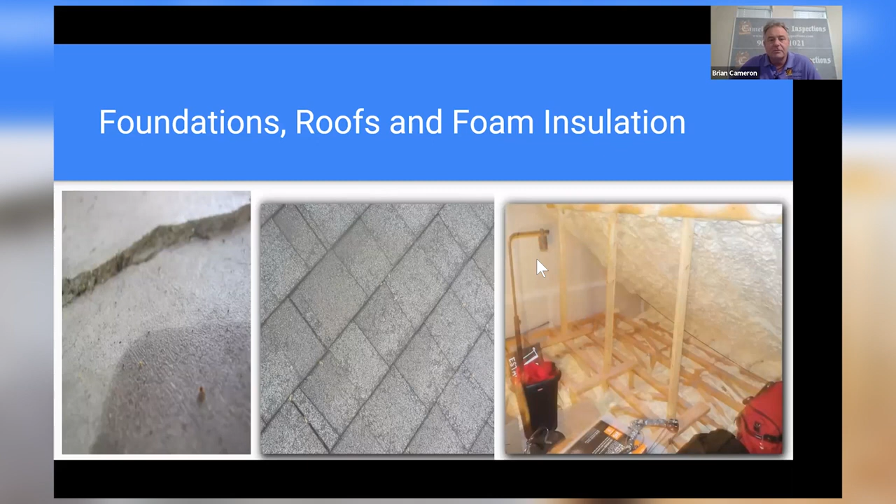What we'll start out with is foundations. I'm just basically going to talk about how I do my foundations and things that I find.

How do you consider a foundation to be bad? Really, that's not our job to consider a foundation bad. We see things that don't look right, and then we should be telling our clients that they should get a foundation company or structural engineer, whatever term you use, to go out to the house.

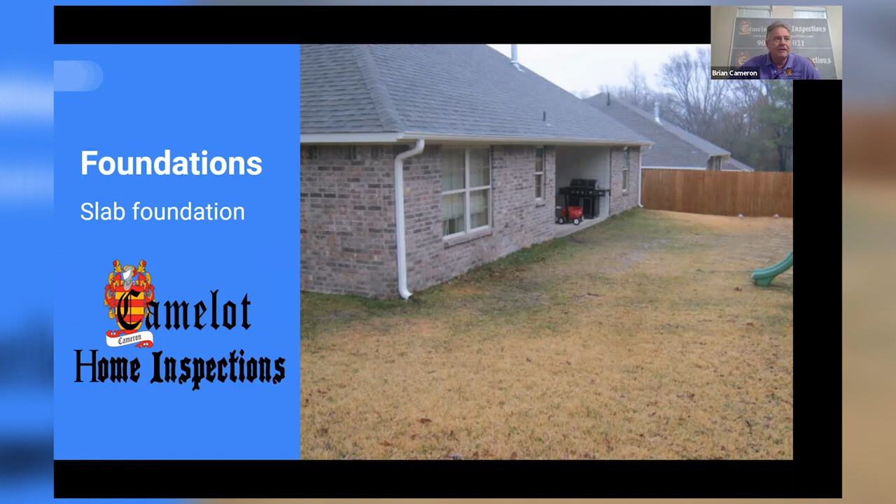So basically, what I'm going to talk about is how to try to figure out if there's a foundation problem or not on a home. The best thing to do, if you think there is, is to put down that they should get a foundation company to come out and take a look at the foundation.

Things that I look for when I'm going around - you can see this first picture right here, they've got a low grade right here. And you can even see a little bit of water that's there.

I don't know, can you see my cursor? I don't know if you can. If somebody can, just type something.

You've got your downspouts coming down right here. It should be away from the foundation area so water doesn't go back up against the foundation. Those are things that I look for.

If I see one crack, that doesn't mean there's a foundation problem. That just means probably settlement in most cases. There have been incidents where there's been a crack and yeah, it was a foundation problem, but in most cases, if you have just a normal crack, it doesn't necessarily throw up red flags. There's usually two or three other things going on with that.

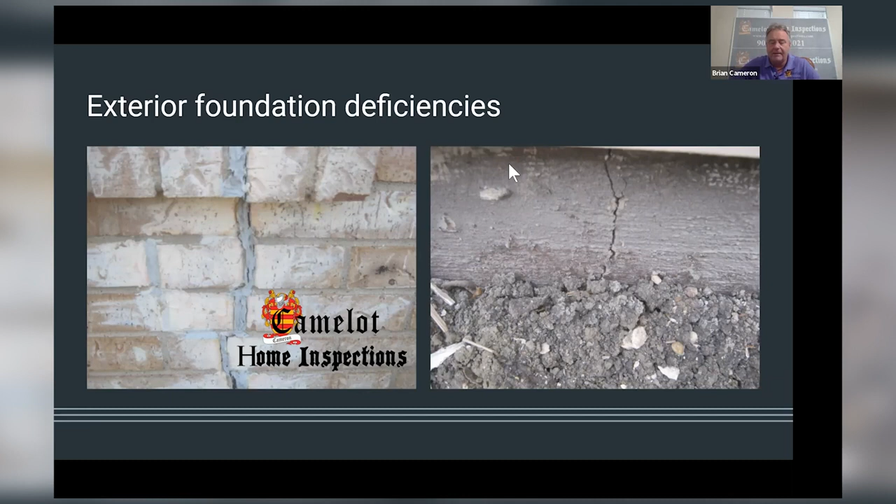The first picture shows cracks that's been basically repaired. That tells me there might have been a foundation problem at one time - maybe they got it fixed. The other picture shows me that there is movement going on there, and that's a lot of movement.

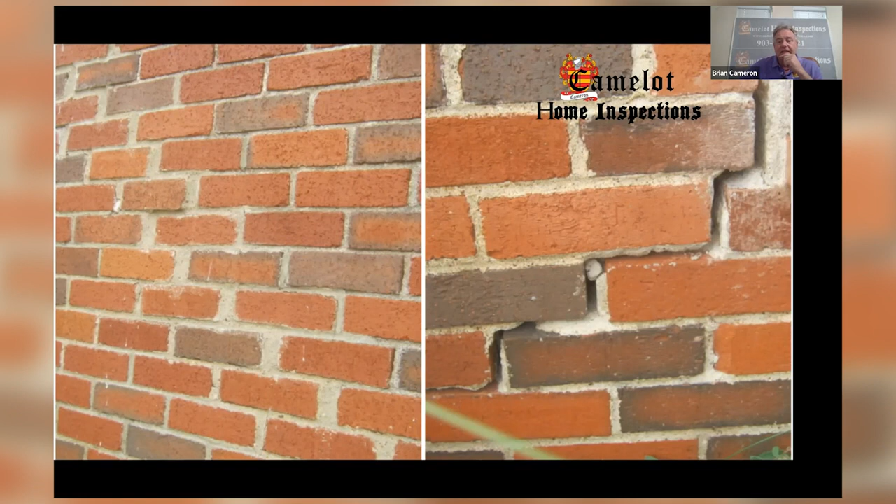You can see right here where the mortar was, and then you can see where it moved. Anytime I see that, I'll probably go inside the house and see what's going on the other side of that wall. I've even seen it where I went up inside the attic and actually saw the roof rafters pulling apart.

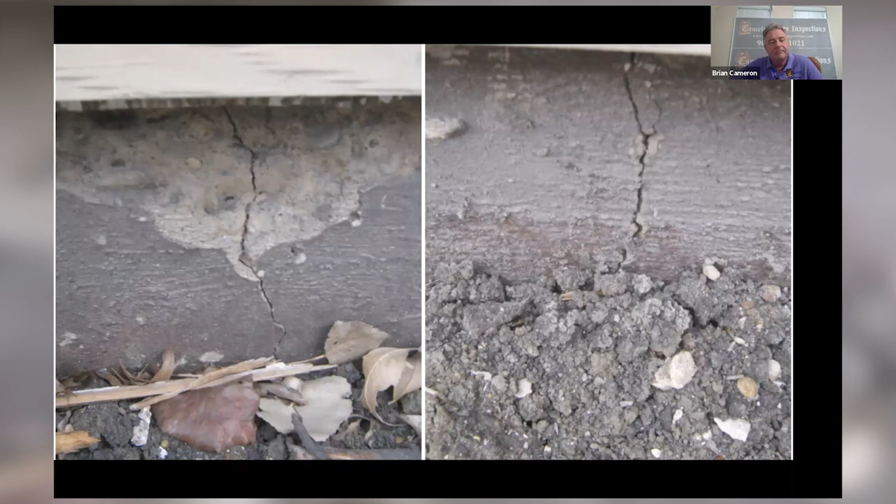Again, foundation cracks going around the house - a lot of times, if you have high soil, that's going to basically keep you from seeing the foundation. I don't go around digging up the foundation all the way around the house. I may take a shovel in a couple of places where I think I might see a crack, but I'm not going to go around the whole house exposing the foundation.

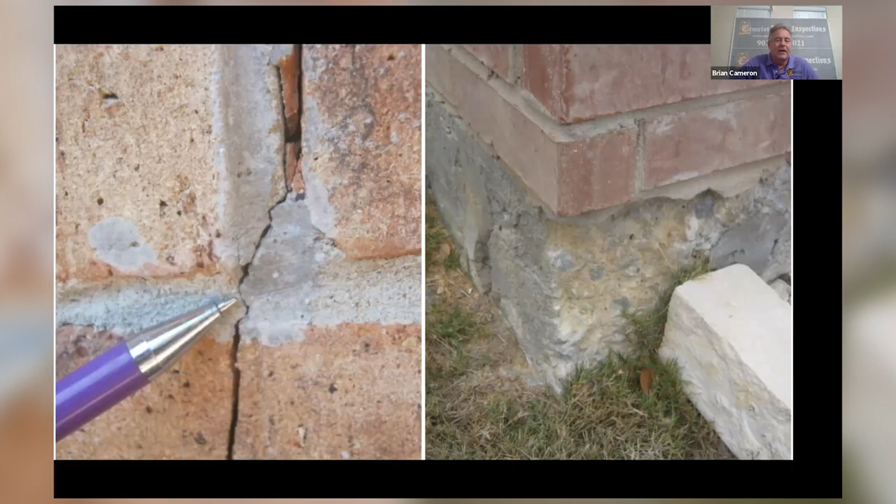This picture right here, the first one, that's what I would call just a settlement crack. That doesn't really bother me as long as there's not a lot of other stuff going along with that. Just keep in mind, the house needs to tell you what's going on with it. It doesn't actually talk to you, we all know that, but all these little bitty things in one area should be able to tell you something about the house.

The next picture is a corner pop. Basically they're caused by the brick - thermal expansion pushes down on that corner and pops it off like that. On this one, I probably would have told them it needs to be repaired, but I would let my client know that's not a big no on buying the house, because it isn't a foundation problem.

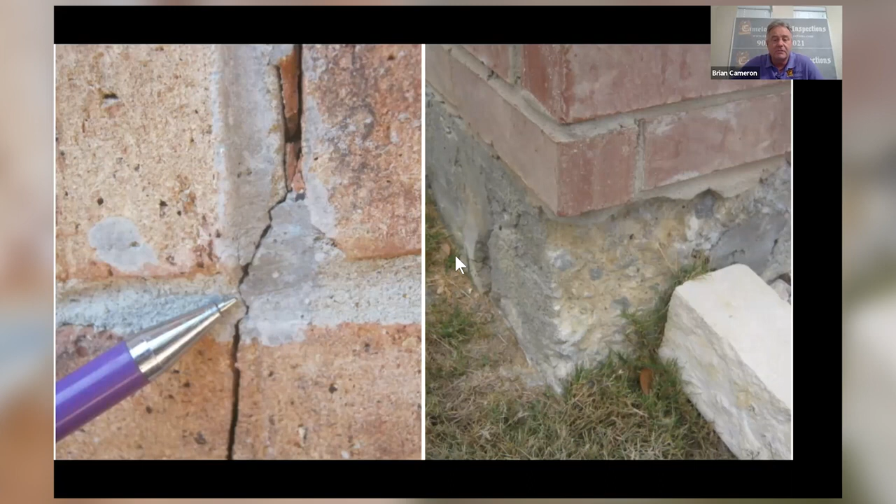A lot of people will see something like that and just think the house is going to fall down. I let them know that this is on just about every house that's around. Sometimes there'll be cracks on the side. I'll put it in the report, but I don't make a big deal out of it. I let the client know, because if they walk around and don't read the whole report and see that, they're going to think I missed something unless they go back to the report. So I try to point these things out to my clients.

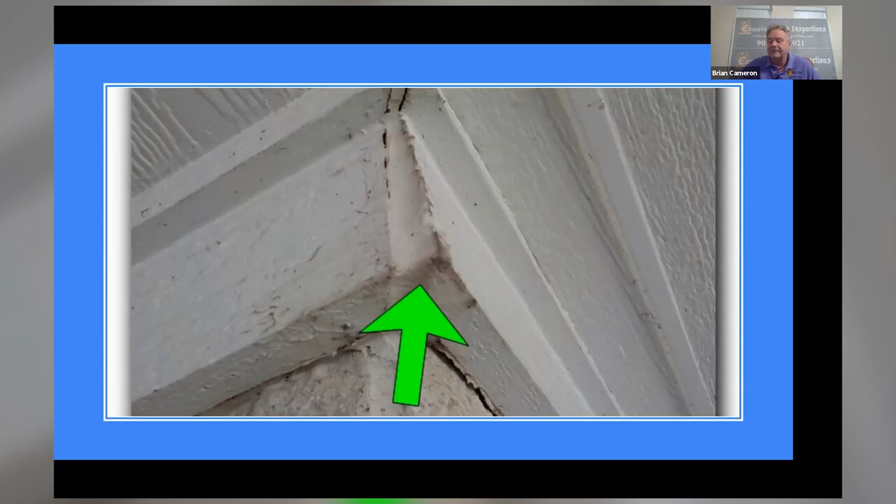If somebody needs to slow me down, I guess you can text whatever you need to do. I see something up here, let me see what this is. Yes, okay, thanks guys, I appreciate that. I didn't know what that was going on.

This is another foundation issue. If you're walking through a house and you see this, you know there's something going on. But at the same time, I'm still not going to tell the client that you have a foundation problem. I would bet my kid's life on it. What I'm going to do is put it inside the report and explain to them that they really need a foundation company to come out and take a look at this and further evaluate what's going on. Me and you may know without a doubt that it's a foundation problem, but in my report writing, I let them know it does need to be looked at, but I'm not going to put in my report that it is a foundation problem.

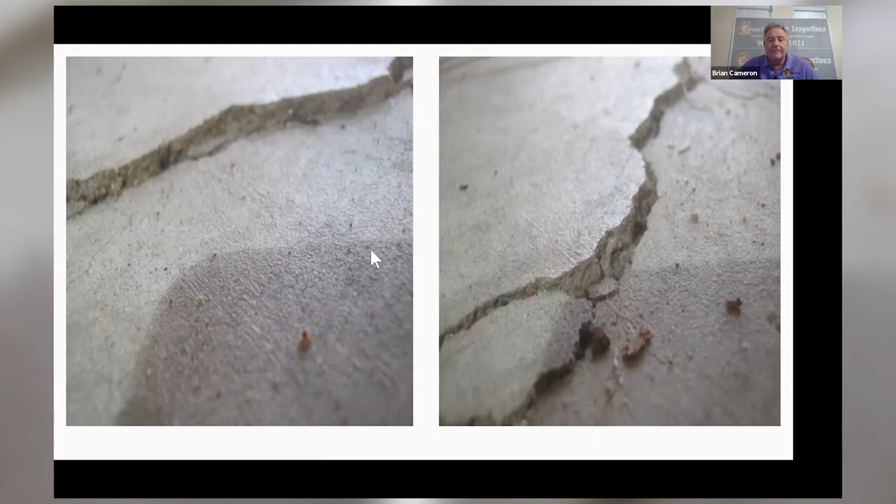Let me make sure I'm in the right place. Yeah, okay, this little square right here, does anybody know what that is? Now that I know where to look for my chats, does anybody know what this square is? Just say it.

This little square that you see right here is normally where a pier has been poured to support the house.

Yes, John. Thank y'all, guys, I appreciate it.

When you have this, I notate it, not necessarily that there's been foundation work done, even though me and you know this without a doubt, I'm still not going to put it in there. The reason why is because you can have a client, a seller, not know the house had a foundation problem, and they can just come unglued, and then you have to go back out to the house and explain to them what's going on. You don't have to, but it's the right thing to do. So in order to get rid of all that, I put down that there is movement, and it looks like there has been some foundation movement inside the house. There are these little squares that resemble where they would put piers for a foundation problem, and you see where I'm going. You can read what I got right there on the side. Basically, that's one of my narratives for this.

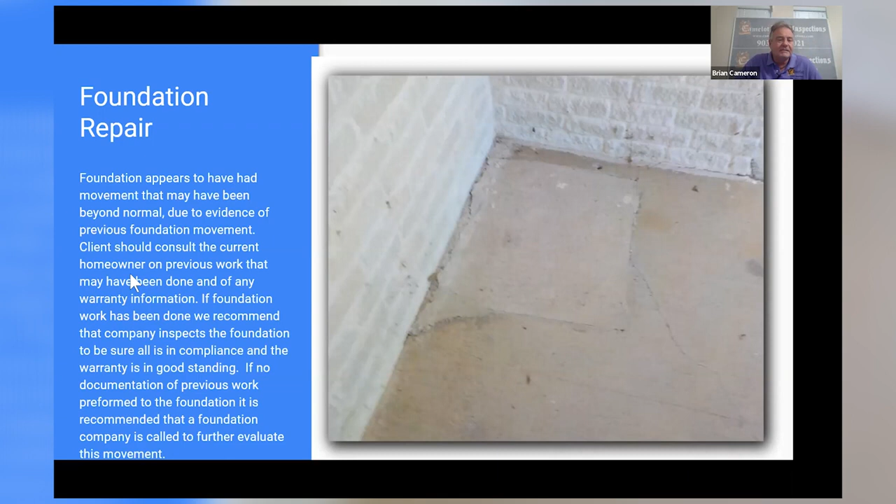So it's the diagonal lines I really pay attention to. Another thing to check is inside of closets. A lot of times people flipping a house won't take care of cracks inside the closet, they may just paint over them. If I see a crack that's been sealed up, I'll say it looks like there was a crack there, I put in my report what I'm actually seeing. Older houses are going to have cracks like this that have nothing to do with the foundation at all. You have to figure out which is which as you go through the house, let everything come to you and you'll figure it out. Then you'll know whether you should call a foundation company to come look at it, or maybe it's a crack that should just be monitored since it's not causing problems now, but we don't know what it'll do in the future.

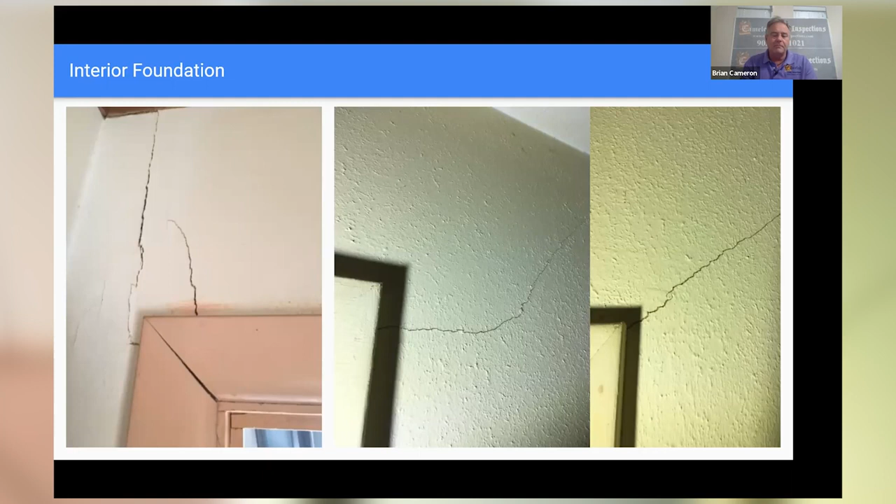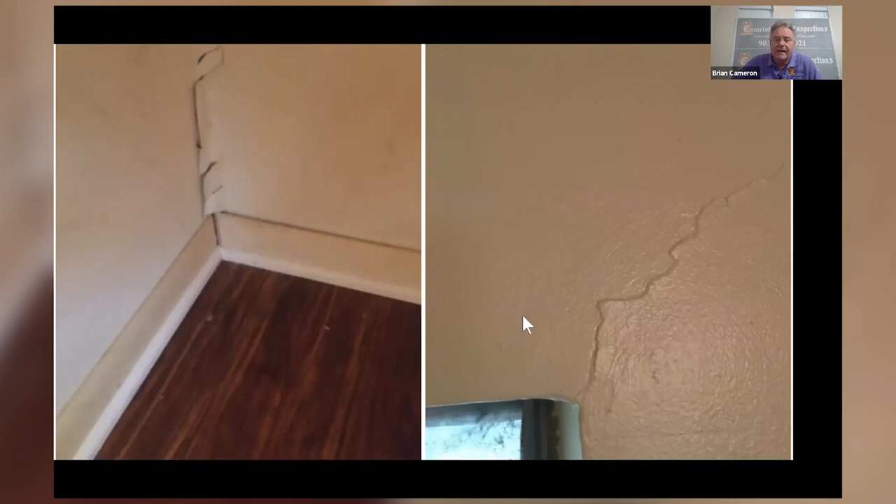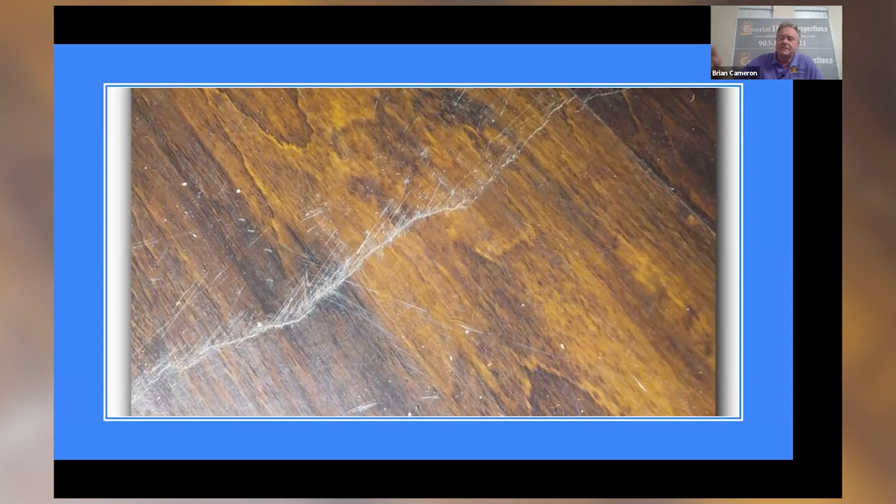To tell you the truth, this floor right here with the crack going through it underneath the linoleum is good enough to put down that there's foundation movement going on and it needs to be looked at. But I like to know for myself - the more things you look at like this as an inspector, whether you're new or a veteran, the more you search it out, the more knowledge you'll have on each inspection you do. It's going to make you smarter and smarter.

Pier and beam foundations, basically just rotten wood, moisture, rotten wood, fungus growing on the subfloor.

Hey Greg, good, the fungus growing on the subfloor - basically that's from moisture. If you go underneath the house and there's a dark colored powdery substance underneath the subfloor, I don't call anything mold. That's not in my vocabulary, it's not in my reports' vocabulary, but it's either discoloration from moisture or something like that. Anytime I find that, I put it in the report and let them know they have some kind of fungus growing underneath the house, most likely from water, or moisture is a better word.

What happens is moisture gets on the ground, and that ground moisture will evaporate, and when it evaporates, the wood sucks it in.

When the wood sucks in moisture over years and years, it's going to cause wood rot. If you go underneath the house, you've seen where it's caving in, the wood's caving in. That's usually from too much moisture underneath the house, unless it's termites. But I'm talking about when it's moisture.

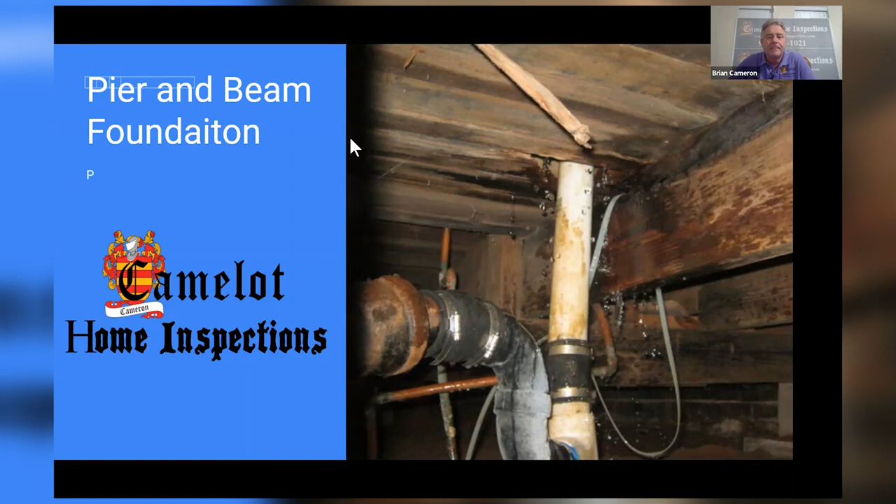This first picture in that corner - I can tell you a few places where, whenever you drive up to a house, you got the valleys coming in the front, and then you got a porch with the cover on it. Where those valleys come, when you have a pier and beam home and water's falling down onto the ground and bouncing back up, it's going into that crawl space area. That's a lot of water throughout the years.

This one right here, I remember I could stick my finger right in there. The wood over here is good and the wood over here is good, but some way or another, the water was coming off the roof and hitting the ground and bouncing back up into there - there might have been a vent on the other side of this. Anyway, water was bouncing back up in there and going to this area.

Again, I don't explain all that inside of my report. I basically put in there that there is some rotten wood and we recommend a pier and beam company come out and take a look at it.

Over here to the right, you see the piers right here. I didn't get the picture that good, but those two boards you see right there are going straight up to the floor joist. You can't have that, especially when the house is using beams all the way around. There are very few houses I've run into that use the floor joist to support - it's almost like little boxes everywhere, and then they've got the piers coming up supporting that.

But anytime you have a pier that goes straight up to a floor joist like that, basically what's going on is when that house is settling, where those piers are, they're going to leave humps in most cases. And you don't want that.

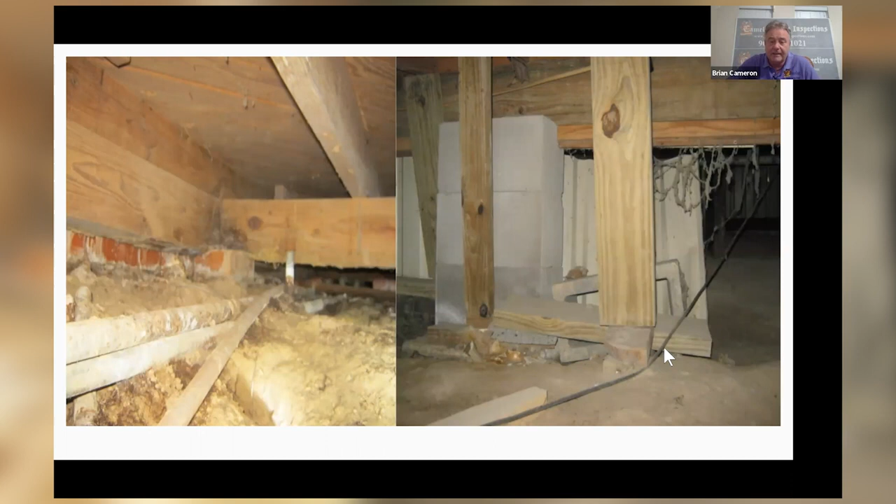This area right here was where the water is coming off the valleys and hitting - no one knew about it. This is at the very front of the house. It's kind of hard to get to, and the wood was just decayed away. They even had some foundation work done to this house. You see that board underneath - that's a newer board than everything else. I don't really know what they were doing there, I have no idea, but it went into the report.

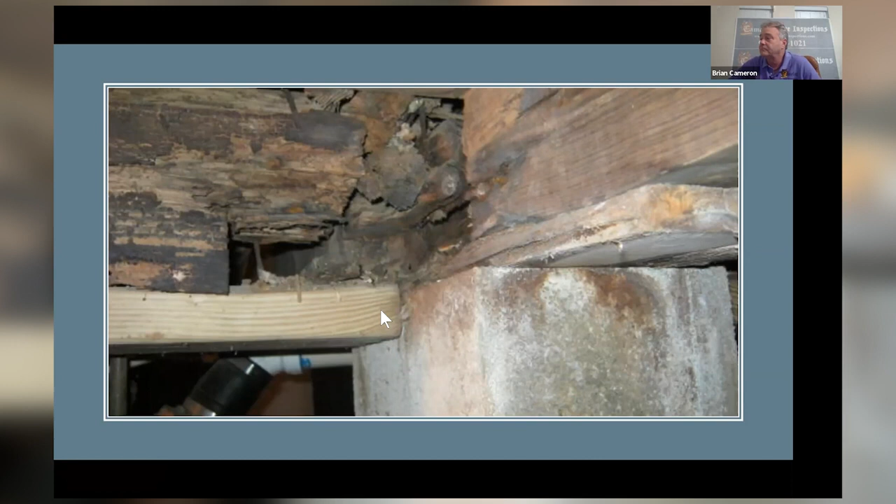Again, this is that fungus I was telling you about. This is the water stain. Your main place is to look underneath the house. You're not going to be able to look at every inch of everything that's going on, but what you can look at, if you can get to it, are laundry rooms, bathrooms, kitchens - the places where there's valleys coming down and the water's hitting down.

If you have a front door that doesn't have a cover over it, underneath, inside the crawl space, underneath that threshold of that door - front door or back door - you're probably going to find wood rot there. Those are places you can go and look and you'll know. If you're just getting started out, it's best to go inside a crawl space and take extra time in there and look at things. You'll be surprised what you find when you take your time and really go through it and look good at everything on there inside the crawl space area.

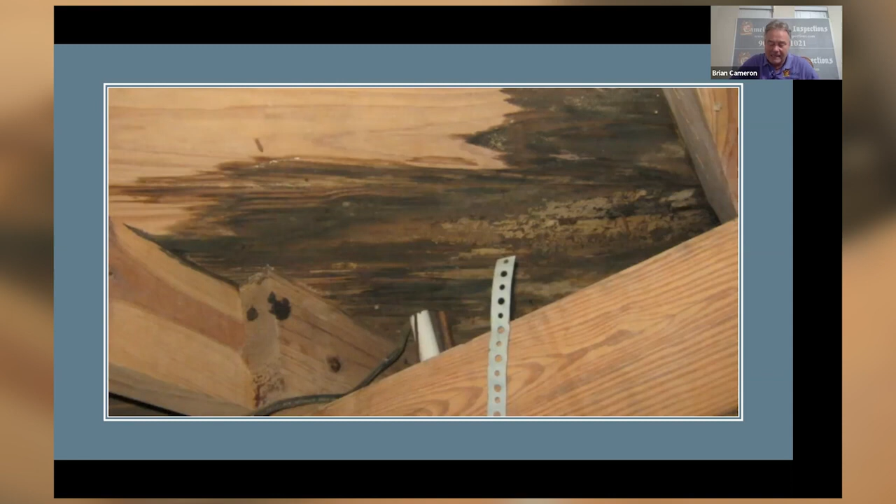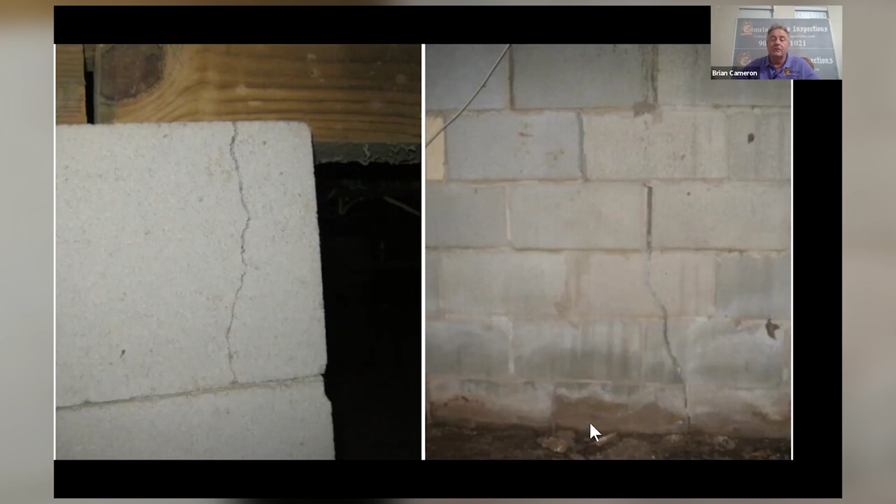The next picture we have up here at the top, where these cinder blocks are, you come down and I can tell somebody's done repairs there. That doesn't really bother me, somebody sealed that up. But anytime I have a pier and beam foundation wall like this with cracks through the cinder blocks, and I see there's been water down here - that's a water line, and you've got some efflorescence going on right here - there's a water problem underneath this house. More than likely it's gotten wet and one side or the other has shifted or sunk down, and that's what caused that. Again, a pier and beam company would be called out on this.

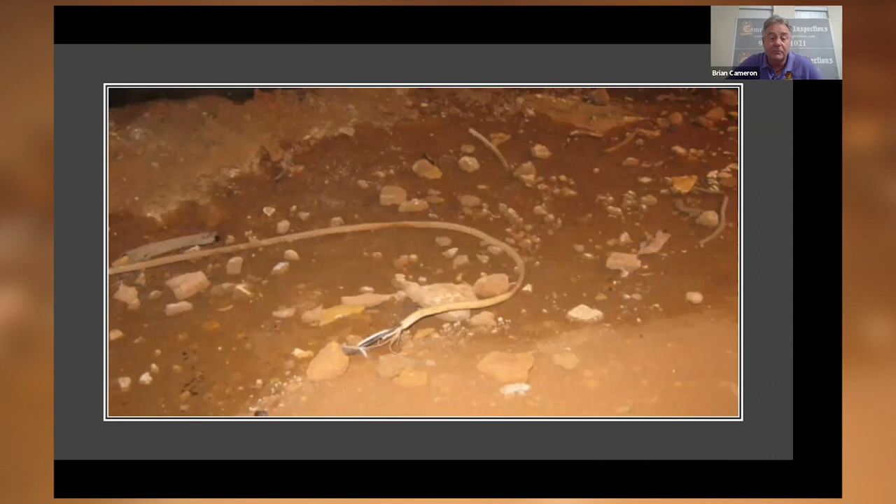Electrical wires, we talked about that. This electrical wire right here was actually live and in a moisture area, so I stayed on all dry ground whenever I went underneath the house, and I made it out. I didn't see this until I was all the way in there, but I won't go under a house if I see a bunch of electrical wires. I won't go underneath the house if they're all on the ground. I'll basically just let them know they need to get those electrical wires up off the ground.

Brian, you said the powder is, and then you stopped. Are you asking me what the powder is? That was from a while ago. Sorry, I'm just not seeing that. Oh okay, I see what you're doing. Okay, did I answer the question on that - the powder is? Okay, good. Thank you.

Anyway, electrical wires, you need to watch out for that. All electrical wires shouldn't be on the ground. If you go underneath the house and you see sewer pipes that are basically on the ground, I write that up - they should be on straps. That way, if the house is settling, that pipe's going to move with the house. It isn't just going to sit on the ground while the house moves, which would cause problems in the connections of that pipe.

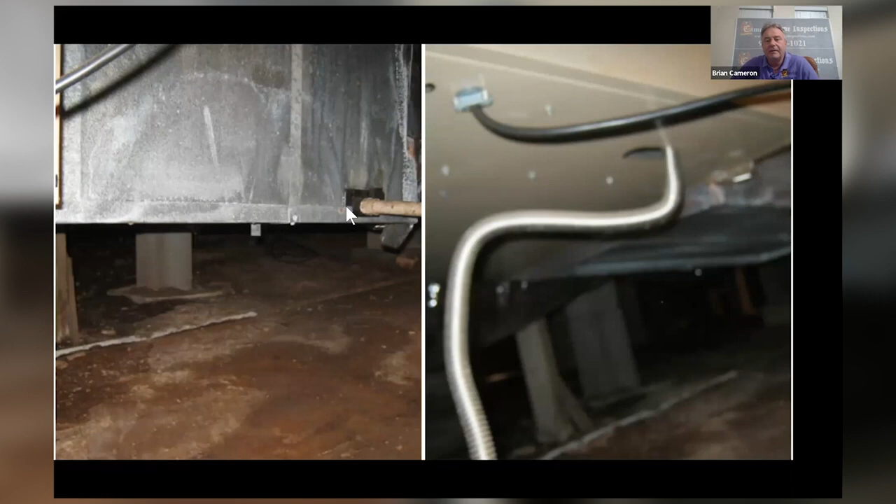I know we're not talking about HVAC units, but you're going to run into those inside of crawl spaces. They should still have a drip pan, and they should also have their secondary line going out of the house as well. This one right here doesn't, and it should. And then over here, let me move this line - that is actually a flex line, and it shouldn't be going into the cabinet like that. They should have a rigid pipe coming out. Again, we're not talking about HVAC units, but since that was in there, you're going to run into these.

Same thing with the water heater - if you've got a water heater underneath the house, I would want it in a drip pan, because you don't want moisture on the ground. You want that moisture to run out, and if it's in a drip pan, it's probably going to run out. The more moisture you have, the more insects and rodents you're going to have. And if it's a lot of moisture, you're going to have piers that sink down into the ground.

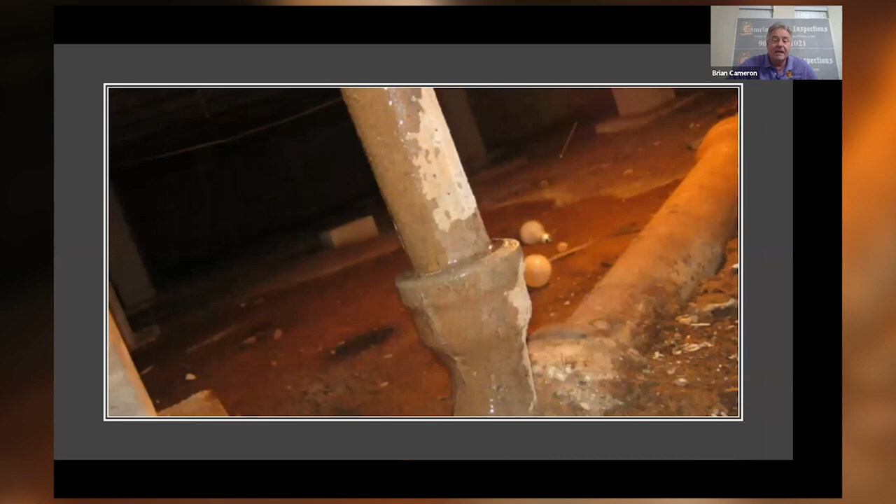Cast iron pipe - anytime I run into a house with cast iron pipe, I make a notation of it and really look at it as well as I can. I'll go as far as taking a screwdriver and digging underneath this pipe to see if there's any moisture. If you've got a house built in 1960 or 1970 with cast iron pipe, I don't put this in my report because I'm not supposed to, but I do tell them it would be best to have a plumber come out and take a look to make sure it's still functioning as it should be. A lot of times I'll find where they've replaced a lot of stuff with PVC, but you'll still have a cast iron pipe. This one right here is leaking at the connection.

You'll also see cast iron pipe, and you'll see little anodes coming off of it. It looks like slime that's dripping, but it can be hard. What that is, is the cast iron pipe dilapidates, and moisture is moving in between the dilapidation. Basically what it's doing is water is just coming through, but it isn't big enough to really drip yet. You'd probably stick a screwdriver in there and punch it.

Why would you? Okay, here's the reason why. If you do a home inspection, somebody just asked, why would you not? I do make a notation of the cast iron pipe in my report, regardless if it's good or not good. Does that answer your question, Steve? Okay good.

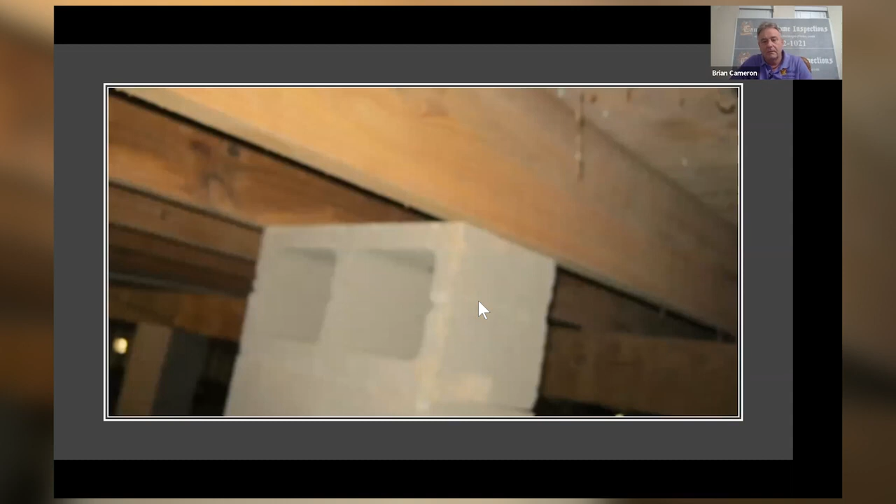Again, we have this area right here where you see the beam back here going straight across, but you have a pier going up against a floor joist. You don't want that. If they're going to reinforce this for some reason, they should take a beam from one end to the other, is what they should really do.

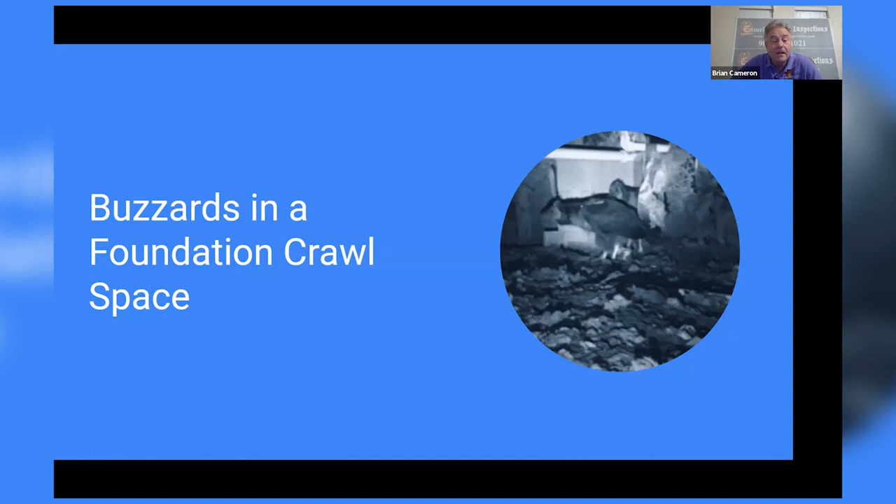Inside the crawl space, I've run into a lot of weird things. The weirdest, I guess, that you wouldn't expect is buzzards inside the foundation crawl space. Man, you're talking about something stink - that was horrible, and those were baby buzzards too. What they were doing in there, I have no idea. They didn't bother me, I didn't bother them. At first I wasn't sure what they were, but then the daddy or the mama came in, and I'm glad I got out when that one came in.

Spiders are going to be all inside the foundation crawl space, so you need to be careful and watch out for them. A real quick story - I was doing a house, matter of fact in the town I was living in, as a pier and beam. I crawled in on my belly, all the way inside, and I'm looking up at the floor with a flashlight, and I start seeing these little red dots. I didn't know what they were, so I turned around. About every 4 feet in between the floor joist and the subfloor were spiders - all of them were black widows underneath that whole house.

So I got out of there as careful and as quick as I could. Be careful when you go inside a house - always look everywhere before you actually crawl in, especially on each side of you. I've seen snakes - when I stick my head in there, they'll be right there. You need to make sure you don't just crawl all the way in, get scared, and it's gonna bite you. Anybody that knows me knows me and snakes are not friends - we will never be friends.

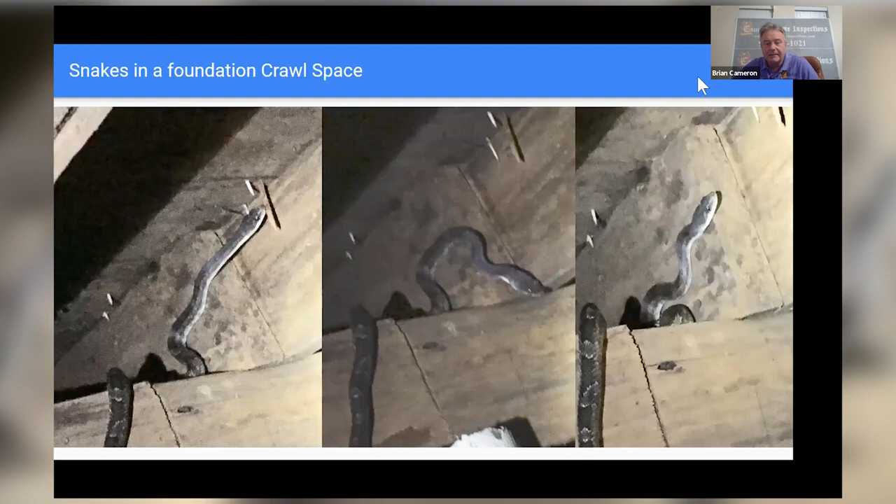This is a picture of a snake that was underneath the house that I did. It's all the same snake, not 3 snakes. And this right here, I did have a video, but I couldn't get it on here, of a snake that I found inside of an electrical panel. I videoed that, but it's not on here.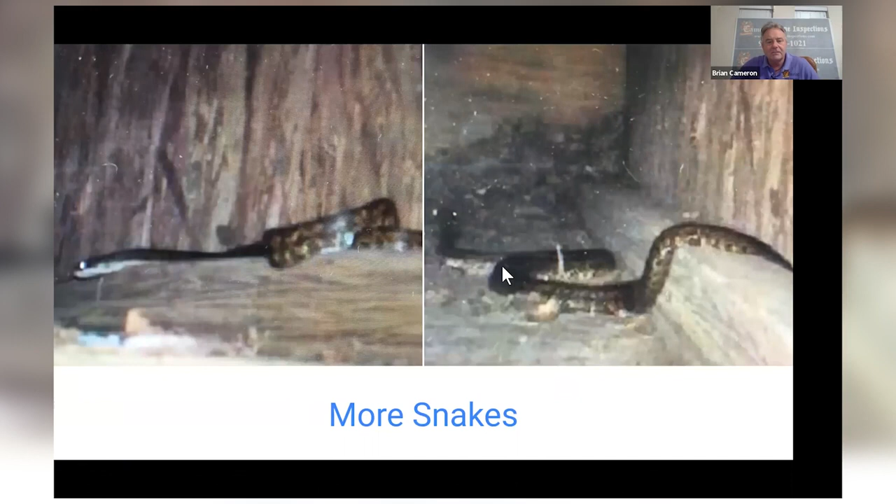Next, we're going to talk about roofs. I'm going to shoot through here because I'm taking too long, and I really do want to get to foam insulation, so if you have a question, keep an eye on the chat and ask. I want to talk about 3 types of roof coverings: fiberglass shingle, metal roofs, and terracotta roofs.

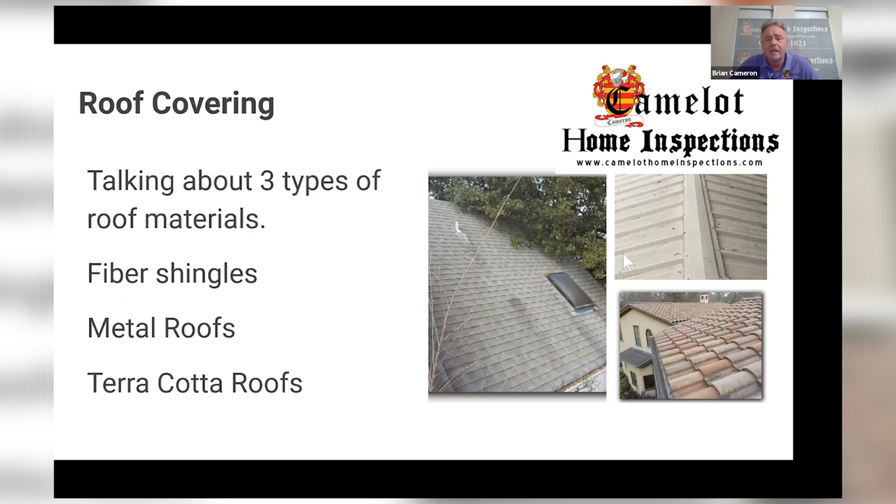Basically, the common deficiencies that I see on fiberglass shingles is the felt paper not being put on right. I'm not sure if everybody knows how to put felt paper on a roof, but on the sides it should go under the drip edge, and on the front it should go over. There's a lot of discussions, and it's different, but that's the way that I do it, and most people in my area do it.

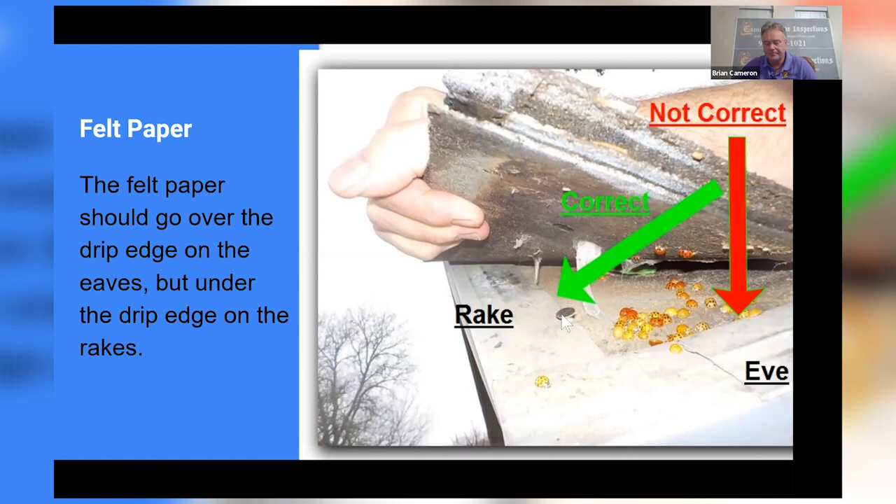Now, in Florida, their code is to go underneath the drip edge all the way around, and I'm sure it has something to do with hurricanes. But where I am, and this is the way most people do it, it shouldn't go underneath the drip edge at the eave. It should go over the drip edge at the eave, and then the rake should go under the rake. Again, it's going underneath the drip edge here. These are areas that you can look at.

When you first drive up to a house, notice where the walls meet the shingle, and raise those shingles up a little bit. Don't tear those shingles or anything like that, but I try to raise them up and put my hand under there, because a lot of times you're going to find rotten wood right there. Also by front porches where it's got a little wall like that, same thing.

Also up here, the soffit will have damage to it, because you have all this water coming down from this roof. On this other side over here, you don't necessarily have it — that's just a regular slope going up, a gable roof right there — but you do have a valley here, and you want to look at these places.

Also around any of the flashing, especially the electrical mast, you want to look at that and see if it's even got flashing around it. A lot of times they'll just put caulking around them, but you'll find some wood right there. Also just above the electrical meter, if you look up in there, you can kind of tell.

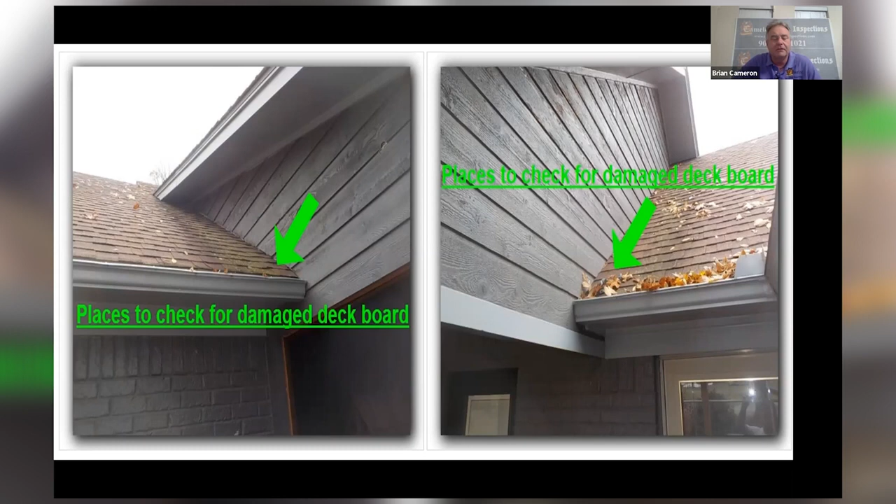With seal strips, you never want to undo them on a roof just to see if the nails are overdriven or in the right place. Once you undo that seal strip, it's never going to be the same again — they'll have to come back with some kind of sealant and seal it back down. If you have a shingle that's loose, you can raise it up if you want, but I tell all my guys, don't mess with the seal strips, don't pull up on them. What'll end up happening is you'll tear the shingle down here, or rip it as you're trying to raise it up to look at something.

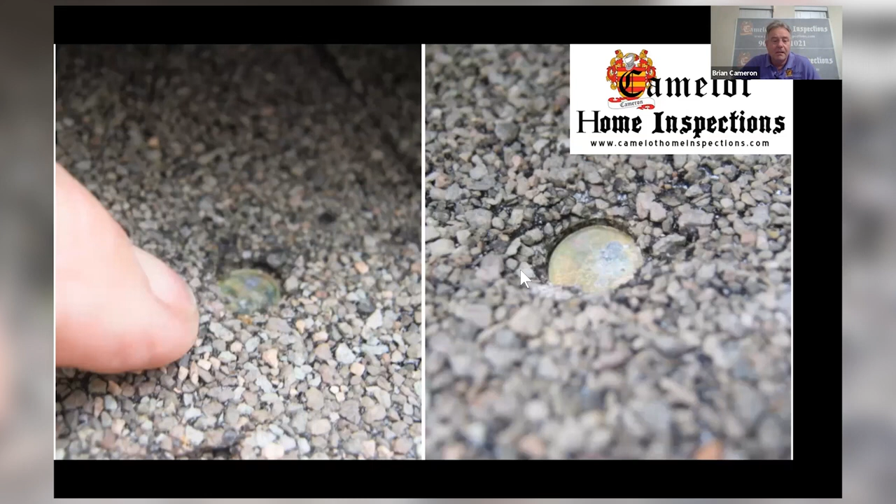On the ridge caps, you can look up there and you'll see that they're not sealed, or maybe they're overdriven. These are overdriven nails, and what happens here is during seasons, this material — the shingles — will expand and contract, and that nail will probably not be holding that. Also, keep in mind the way that the nails are nailed in; we'll get to that at the end of this.

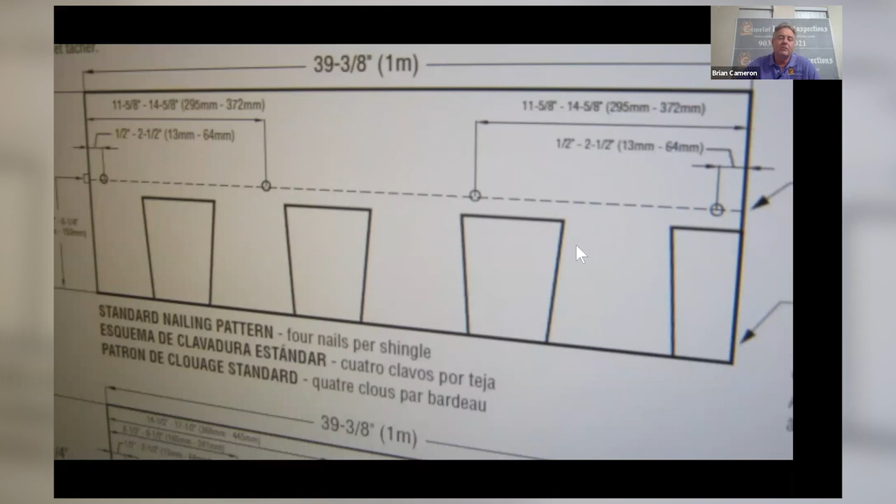The nails should be nailed in to where they're hitting here. You don't need to check this stuff — I'm just letting you know so you'll have the knowledge of it. The nails should be to where they're hitting the next shingle. In other words, each shingle has 4 nails in it, but it actually has 8, because the shingle above it's going to hit it, and the shingle above that's going to hit the one below that. That's just the way it goes.

Also, you can look, I call it the zipper effect. I don't know if anybody's seen it before. It's where the left tab of normally a shingle goes up in a diagonal direction up the roof, and every one of those tabs are loose going up to the roof. What happens is wind will catch up under that, and when wind catches under it, it's going to rip those shingles off. So I do write that up. I explain it as, in my terminology, a zipper effect. Depending on how many of those they have, a roofer can come out with a gun with some good caulking or sealant and put them back down so they're not going to raise up. I don't tell them that part, I just tell them they need a roofer to look at it.

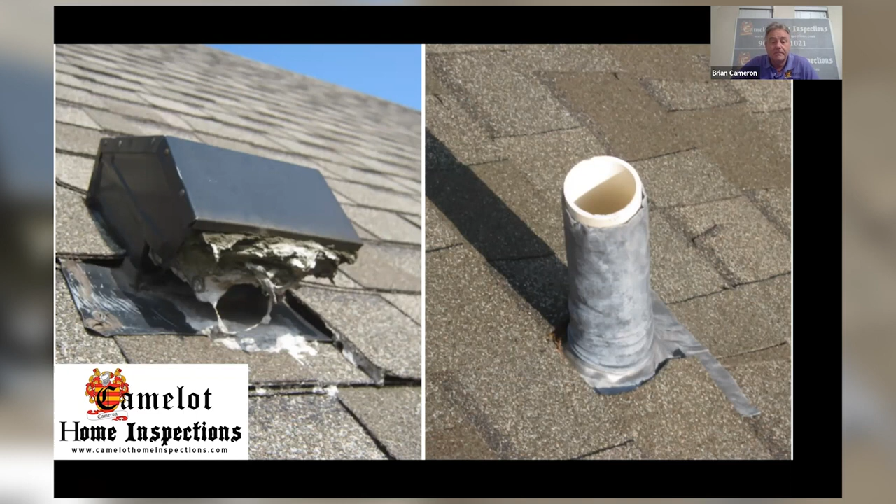Again, each side of the fireplace is a good place to find rotten wood. And where this valley comes down, you've got a water deflector there, also right behind that. Again, you don't want to pull the shingles up, they probably have a seal strip in the front of it, and you don't want to mess with that either. But if you can get your hand in there to look and see if anything's rotten, you can put it in the report.

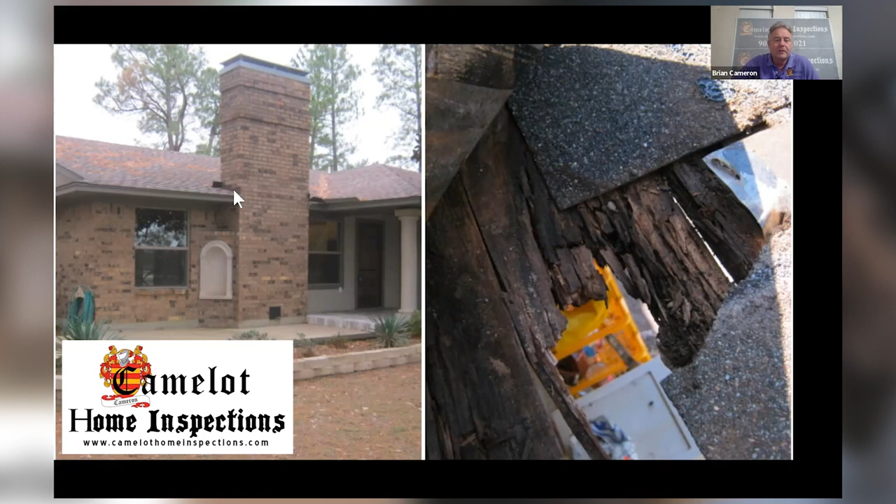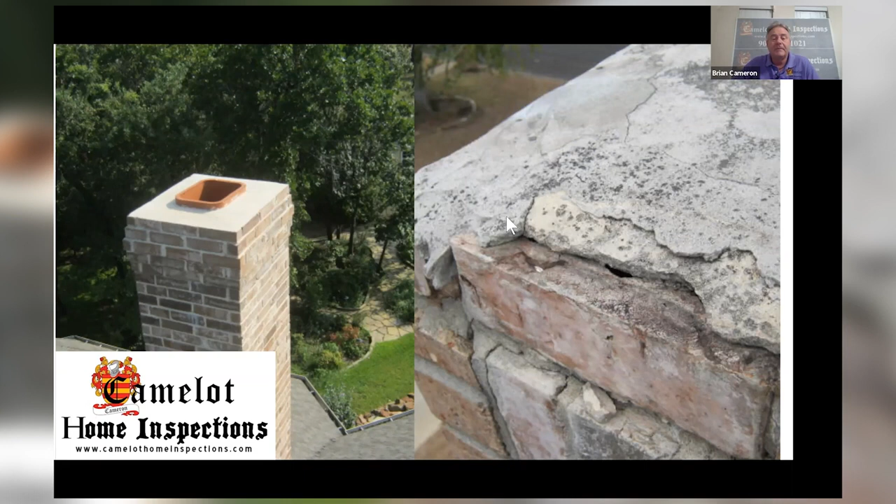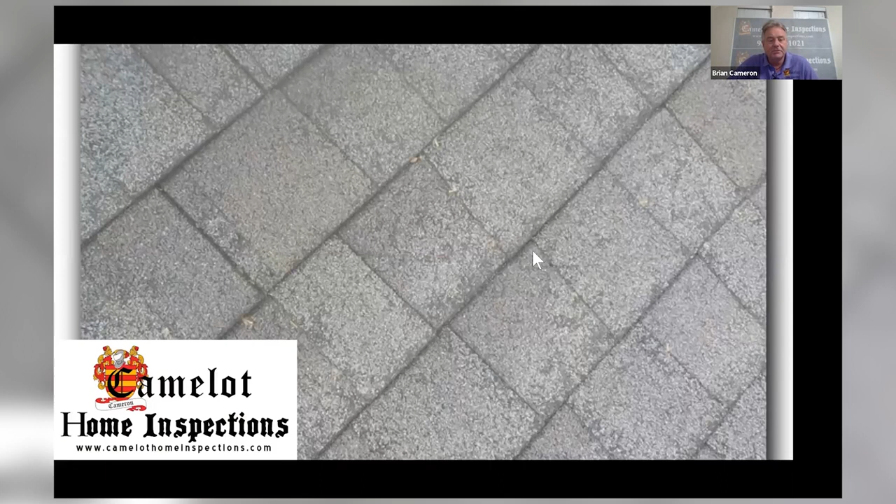I'm going to just shoot through these pictures again, and speed up a little bit.

Layers of shingles in Texas. I let them know if they've got more than one layer. You've got to be careful too - in South Texas, especially anywhere there's wood roofs or used to be wood roofs, you'll find where it still has a wood roof and they've nailed shingles on top of it, using the wood shakes as deck board. If the customer wants to replace that roof, it's going to cost them money because most roofers nowadays will not lay on top of a wood shake roof. A lot of insurance companies - I don't get into this - will not insure a roof if it's got more than 2 or 3 layers on it, depending on what area you're in, if that helps you. But anytime there's more than one layer, I always let everybody know.

Gutters are another item that you want to look at. Ridge vents are another item. You'll find a lot of ridge vents that may be loose.

The roof on the house needs to be aerated inside the attic, which means it needs to have roof vents and soffit vents both. I believe it's 1 square foot to every 150 square feet if they don't have a vapor retarder for moisture. And if it does have that, then I believe it's 1 square foot to 300 square feet. What they're talking about, the 300, is the floor space inside the attic.

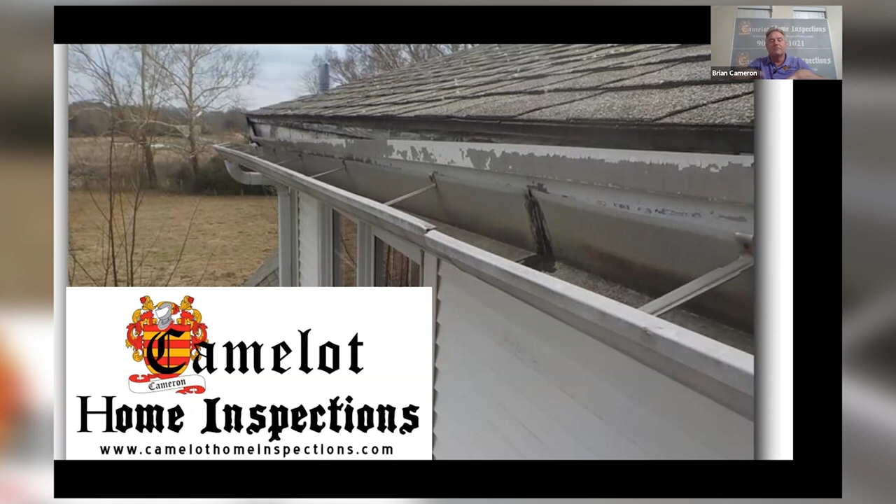And then the 1 square foot to every 300 square feet, that's talking about the square footage of the soffit and the roof. They really don't differentiate between those two on how much you should have of the soffit or how much you should have of the roof. But it looks like to me that the roof should have more than the air that's going in, so that air can be pulled a lot better. So that's something to think about whenever you're looking at a roof.

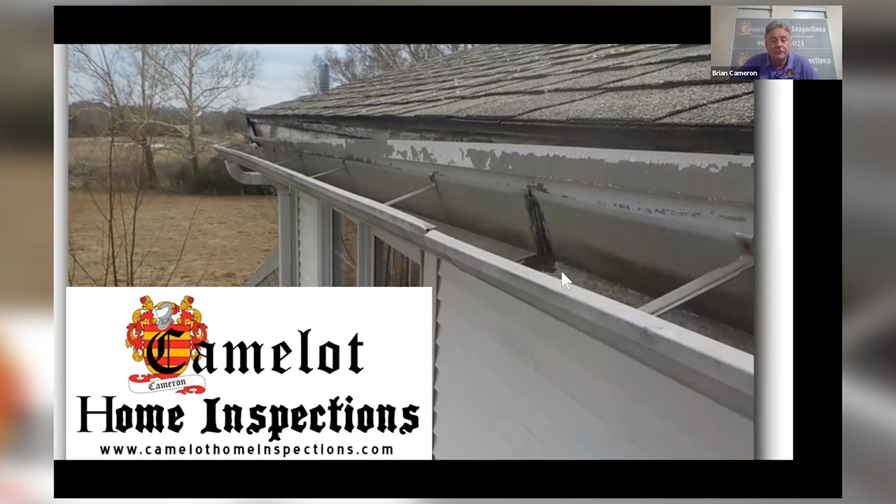Metal roofs, and I'm going to fly through this. Basically, look for the screws. Look for any caulking you see on a metal roof. A metal roof shouldn't have caulking on it. In these areas anyway, there are very few instances where a roof has caulking on it, and a metal roof has caulking on it.

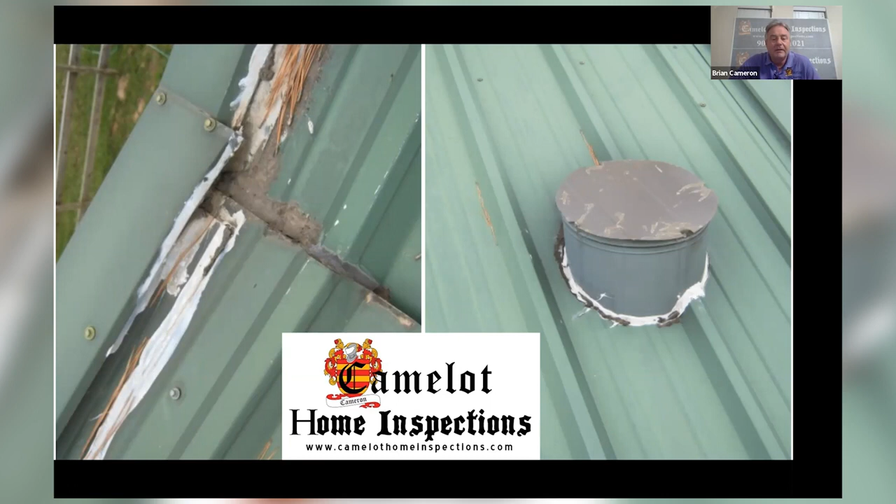Also, there are certain flashings that everything uses. These right here are bathroom vents. You can see they're just put on there. That's not the correct way to do that. I let my client know that they need somebody that deals with metal roofs to come out and take a look at this to do it properly.

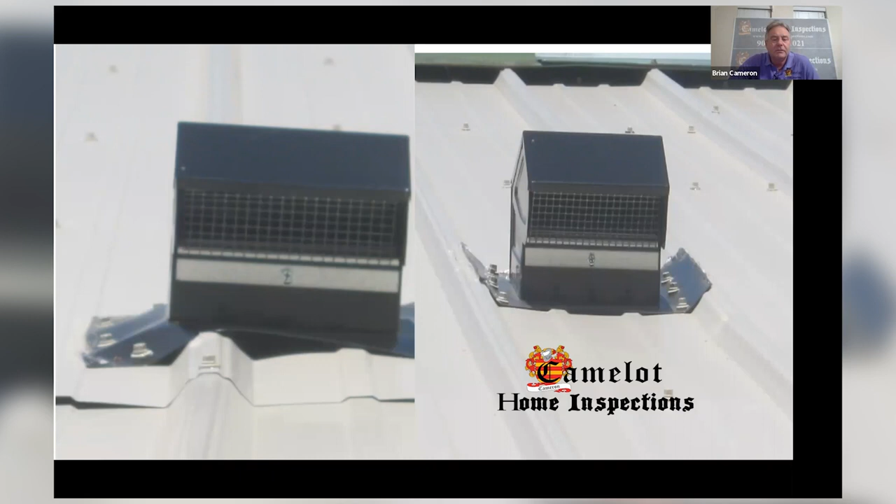On these metal roofs, you'll get wind-driven rain, and most insurance policies do not cover wind-driven rain. That's where there's no opening and the wind's blowing and the rain just goes into crevices, and it can ruin a house, the ceiling inside the house. And there's no insurance for that in a lot of instances.

Used to, there was no insurance at all, and I think they've changed it a little bit, but most policies do not have that. So you want to make sure you point this out and bring it up, and just say, recommend a roofer to further evaluate where the seams are not going down completely and they're not flush. Here goes another one.

Things that you should look for on a roof will tell you what material is used on a roof. Now, not everything's on this one. You notice the ridge cap, the vent ridge up here is there. Even though you have a metal roof, you still got to put ridge vents. It's got to have air in there, it's got to have air circulation. So you still need your vents on the roof, and you still need your vents on the soffits.

And I'm sorry, guys, I'm gonna fix it in a minute. Okay, I think I got it fixed.

So you want to make sure that there's plenty of ventilation inside of the house. Whenever you look at the sewer vent pipes that go through, a lot of times somebody puts a metal roof on a house and they don't mess with the sewer vent pipes. They just leave them up inside the attic, and they're supposed to go all the way through the attic, at least 6 inches past the roof space.

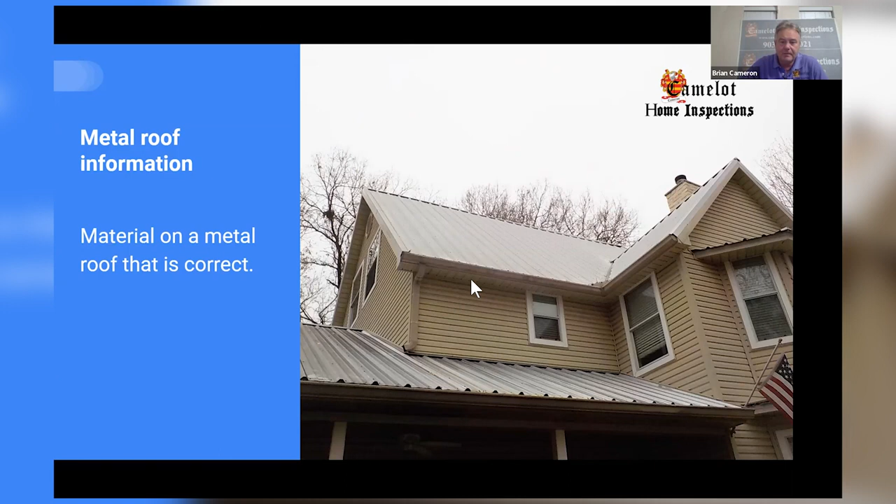The way the flashing is here, that's correct. The way the flashing is on the fascia going up the rake is the way it should be.

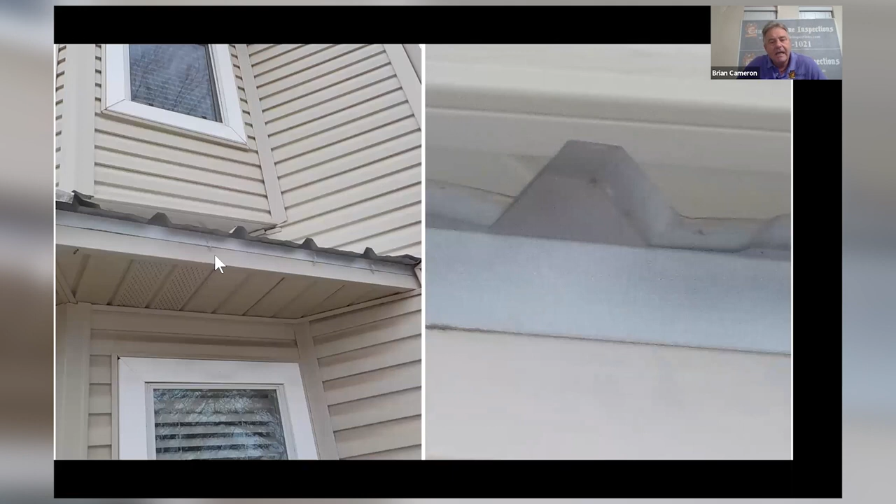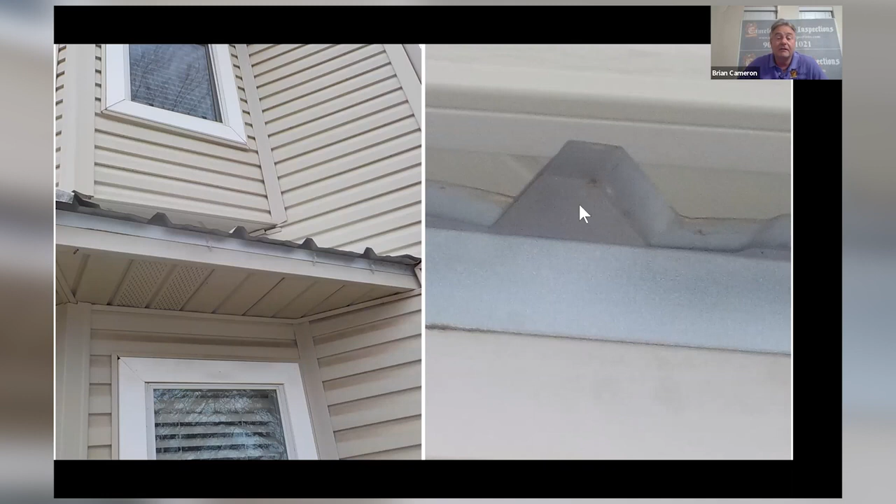You should have drip edge, and you should also have these little foam pieces in the rib area of the rib roof. That way you don't get insects, mostly wasps where I live, going up in there and making a nest big time. That should be in there.

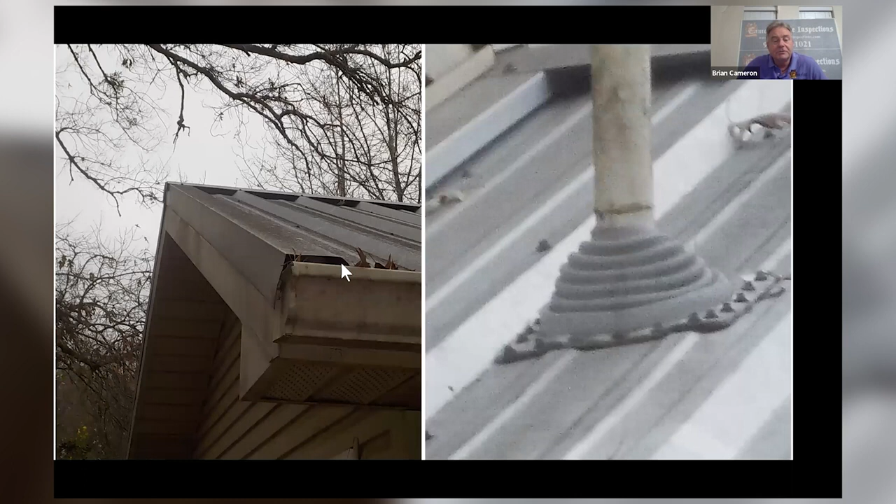Move this over here. The first picture is just showing you the rake flashing that's there.

Everybody look at the way this neoprene boot is screwed in. That little part that the screw's going through is almost like lead, and it bends with the ribs on the roof, and it sits flush. There might even be adhesive on the other side of that, if I'm thinking correctly.

But that's the type that you should use. You shouldn't be using a lead jack or just a plain neoprene boot on there. It needs to be this type of boot for all metal roofs. Also, they make these big enough to go over flues as well.

As far as I know, once the air gets up to the area where this is, the heat isn't going to bother it, is what I've been told. But basically, this is the type of flashing that you need around any kind of stack that comes out of the metal roof. It needs to be this type.

Terracotta roofs, I'm going to fly through this. Basically, I want to make this easy. Go online, you can even go to InterNACHI's, and find things about terracotta roofs, clay roofs, and cement roofs. They have a lot of these down south, and the way they put them together is unique.

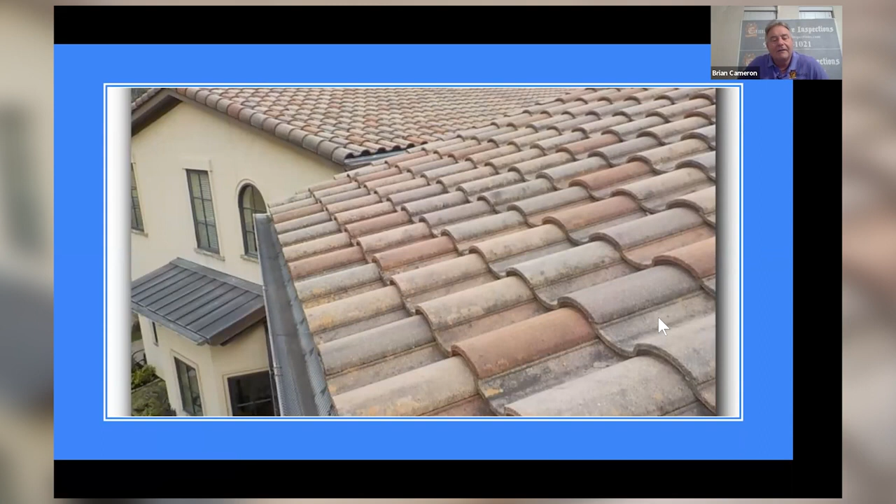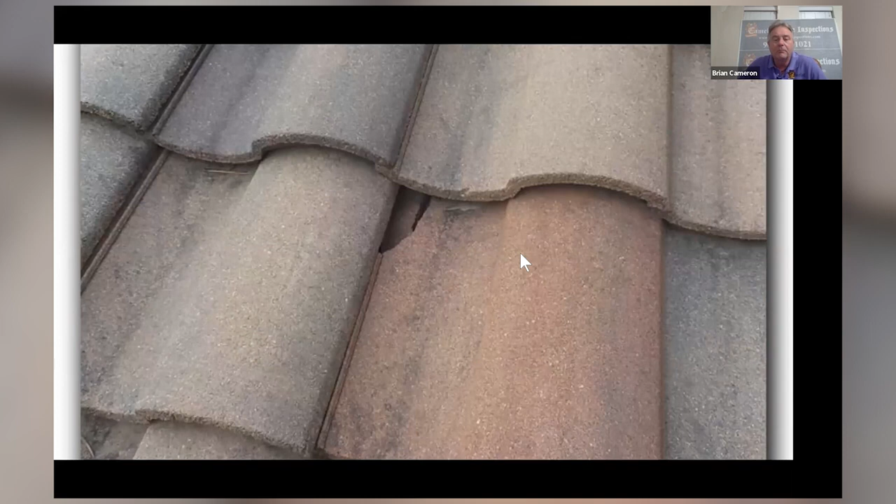But I never walk on these roofs. Basically, I'm looking at it with the ladder or a second story window, and I'm taking pictures of where cracks are, chips are, and things like that. But you really don't want to walk on these roofs if you can keep from it. If you do walk on them, you need to know where you're walking and what you're doing. I'm not going to tell you I've never walked on them, because I have.

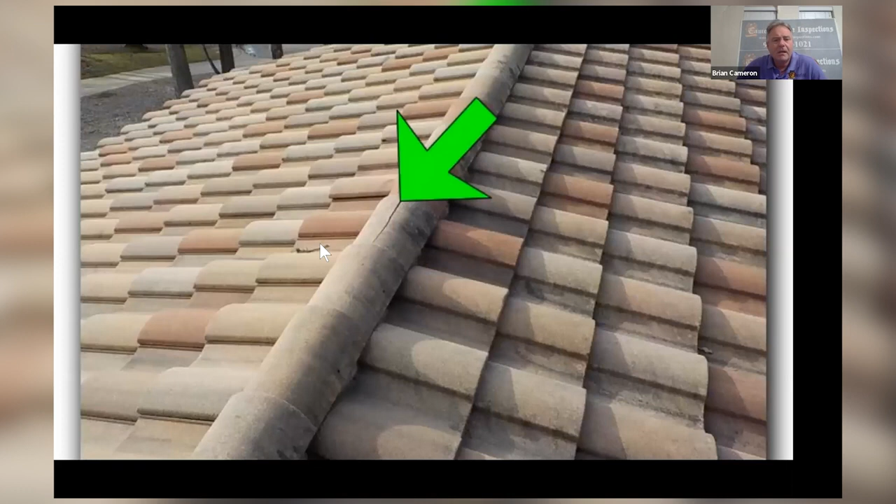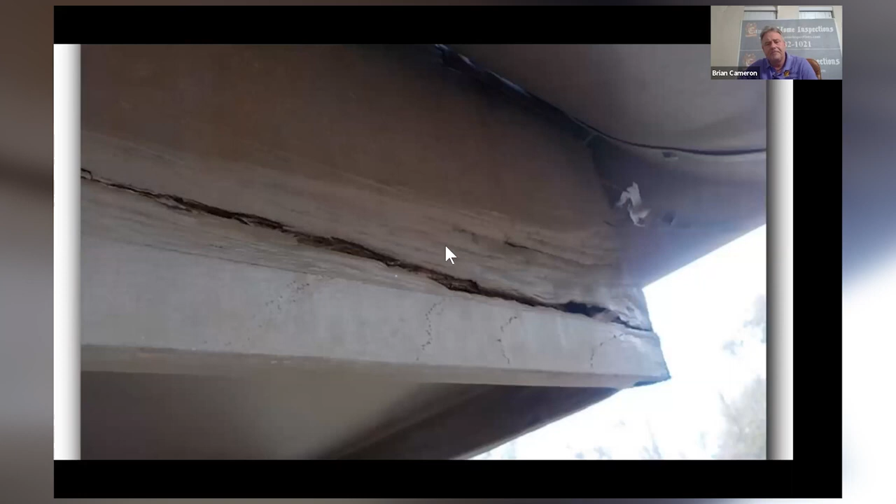Foam insulation. This is where I wanted to be. All right, has everybody run into foam insulation?

You can just type. Yes, I have it in my own place. Good, man. Okay, good. I get it.

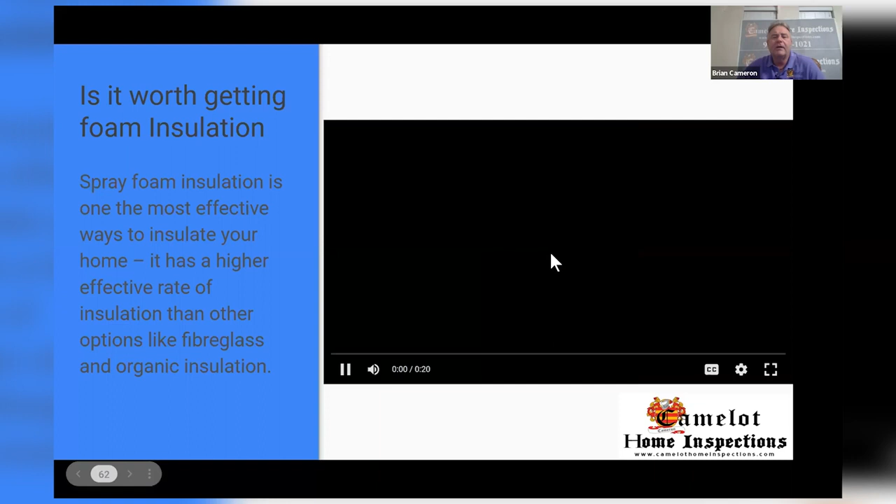All right, basically, I want to play this video right here. You'll notice he's only spraying like a half inch of this, and look how far out it comes.

Okay, basically, more and more foam insulation is coming around. When it first came out in my area around 2000, 2003 and 2004, I would inspect the house that had it in there in 2000 and find a lot of stuff going on with it that wasn't right. When this first came out, they had the spray foam that was not porous. Now it's porous. You can actually pour a glass of water and it comes through. Before, what would happen is, and it's real hard, it's not soft like the foam that should be used.

The one that shouldn't be used on a roof is hard. What was happening was, if you had a leak on the roof, you'd never know it. It would run down, hit the soffit, and run into the wall. You wouldn't know it until it's too late. There's a lot of damage. So they changed over from that type to the type that was porous and water can run through.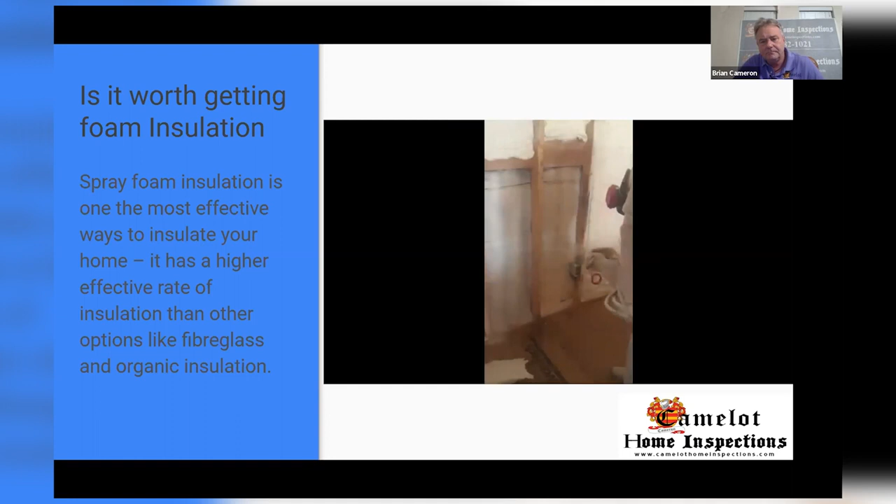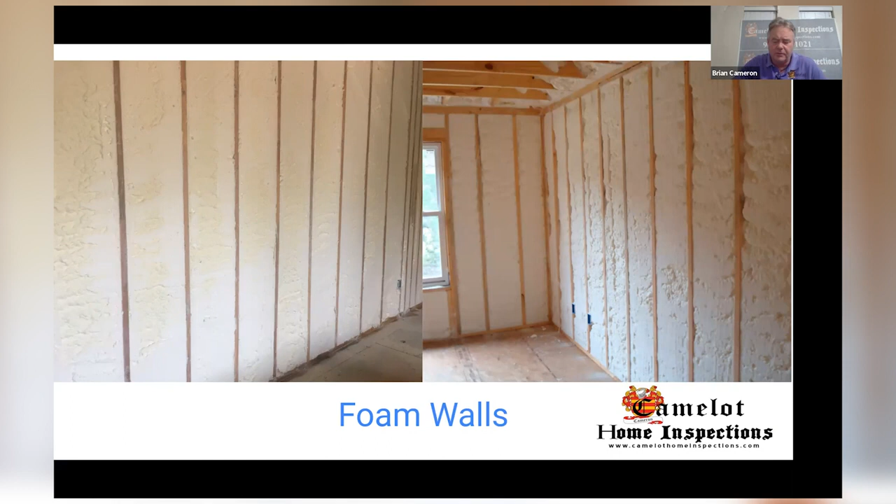This is a wall that's been done. It's a foam wall inside the house. This is another one. Basically, this is nothing here inside the walls of the house. These are exterior walls. They don't put this on the inside wall. Some people do if you got a lot of money, but most people don't.

What they do, though, here's the deal with foam insulation, and we're talking about inside the attic now. With foam insulation, there cannot be any type of other insulation on the attic floor. It causes mildew, moisture, condensation, whatever you want to call it. It'll cause problems.

Closed cell insulation will cause problems if it's a retrofit. All the old insulation needs to be removed. If they've got insulation on the floor too, then the house should be vented, which defeats the purpose of the foam insulation.

Another thing you may run into is insulation inside the house. You may have a bedroom with an HVAC unit in the attic space next to it, and they wanted to quieten that unit down, so they use foam as noise canceling between the studs. It shouldn't have paper on either side.

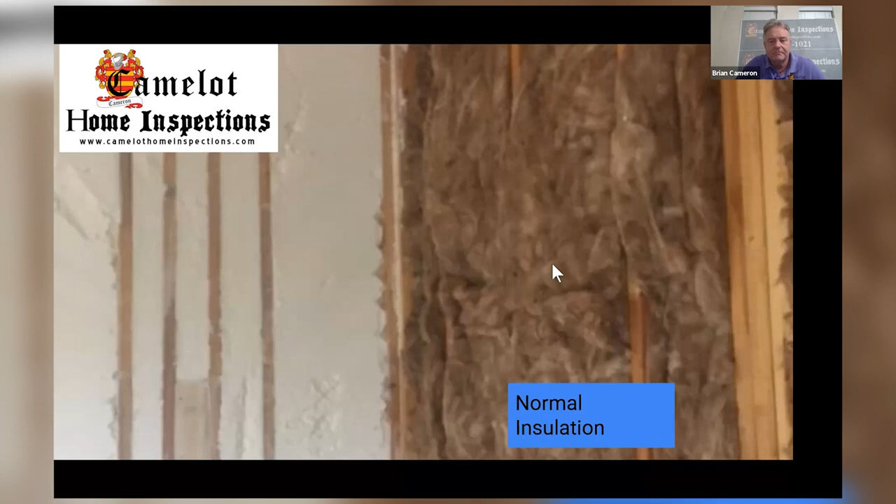I'm looking at the clock over here. I'm going to try to keep on the 5 o'clock, but it may not happen. Basically, on garages, when you have a foam sprayed home inside the main attic above the house, and the garage doesn't have anything, you should have a wall between that garage attic and the house attic with a door that has weather stripping, just like it was a house on the other side.

Usually it'll be spray foam in the main attic, and then the garage area separately. A lot of times they won't put any ventilation inside that garage attic area. They need soffit vents and a roof vent there, but you'll run into cases where they don't. What happens is it builds up condensation on the wood, and over years that ends up causing wood rot.

Before I go to the next slide, consider that a home with foam insulation is like a capsule, even a Tylenol capsule. No air in, no air out. Now, we all know you can't make a house completely airtight, because there's going to be places, but for the most part, think of it that way. There's ways they get air into the house, and I'm not going to get into that, but it has to go through the HVAC unit.

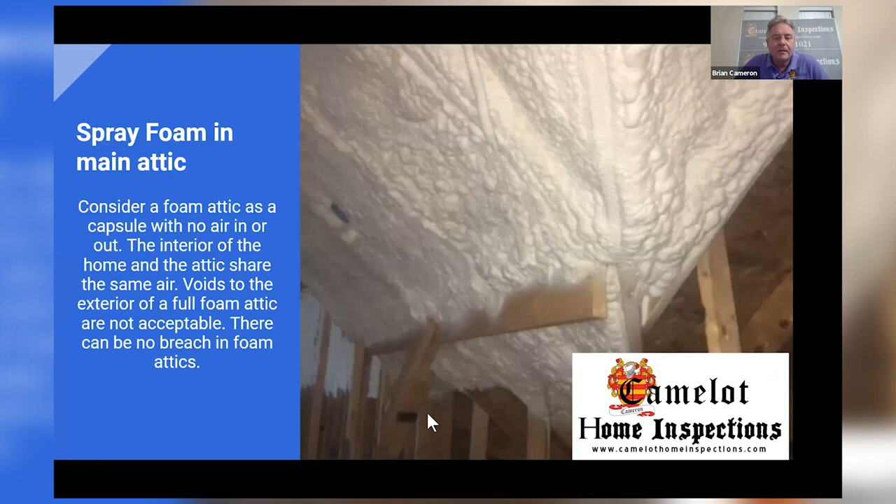I'm going to go ahead and skip this. I want to skip that. I'm going to come back to it, but I'm going to skip it now.

If you have a furnace inside the house, I'm going to go to this because it's kind of important. Naim, I hope I'm pronouncing your name right, asks: does it need ventilation when it does have all the insulation? No, it does not, and we're going to talk about that. Remember, it's a whole capsule. When everything is foam insulation, it does not need ventilation.

There may be some fresh air coming into the HVAC unit, which I'm not going to get into — you can look that up, probably on InterNACHI, and they may have something about that. Some houses require it and some don't, depending on the size of the house. But to answer your question, no ventilation, no soffit vents or anything.

If you have a garage with no insulation, no foam insulation, and it's blocked off from the main part of the house, that has to have air ventilation in it. You can't just block that off. That would be just like a regular house with no ventilation at all. I hope that answered your question.

All right, let's talk about this really quick here — HVAC units. Here's an easy way to think of it. If you have a house that's nothing but foam insulation, airtight, no air in, no air out, you can't have this type of heating unit. This is an HVAC unit, but the furnace can't be like this. It has a metal pipe, think of a metal pipe on top of the HVAC unit that goes to the furnace, and then it goes out through — you can see it right here, it goes out through.

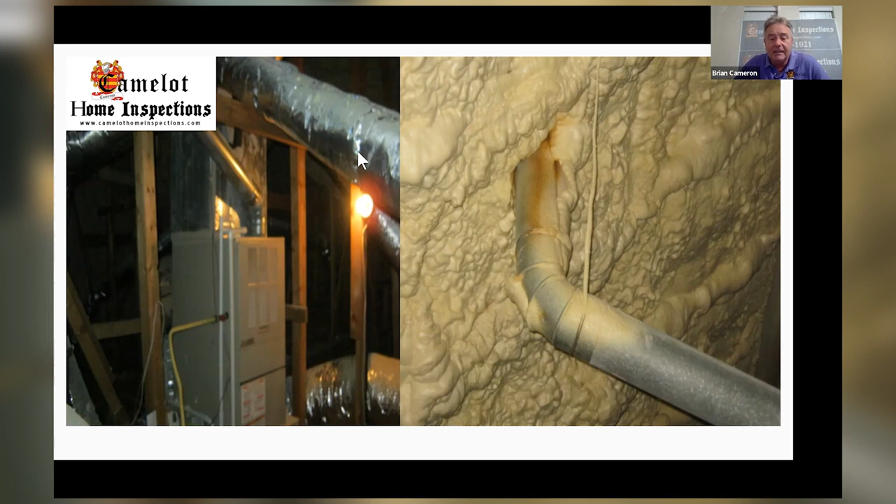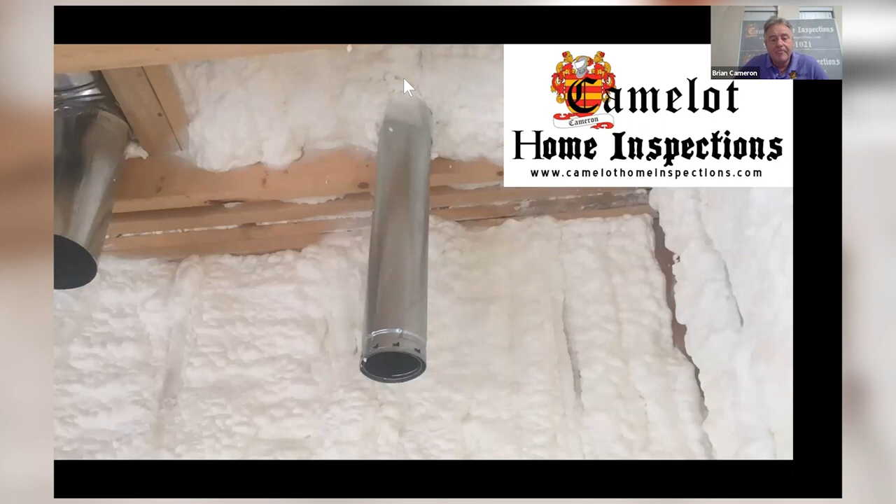This is an instance where they had a water heater flue coming up, and this is a new build. I explained to them you can't do that. So anyway, they ended up having to tear all this right here out. They went ahead and tore it out, and they put in a tankless water heater that had the PVC pipe instead.

I know I keep saying PVC pipe, but I want you to know that's the way it's going to catch your eye. If you go into an attic and see a water heater or furnace with metal coming up, and everything else is foamed inside that attic with no ventilation, then you know something's wrong and they need somebody to come check it out. You can have an HVAC guy come out, or a plumber should know, or the foam people who put the foam inside the house should know. Somebody should know. I haven't run into new homes like that, but I used to run into them all the time back in '07, '08, '09, when they would just put regular furnaces and water heaters inside the attic area.

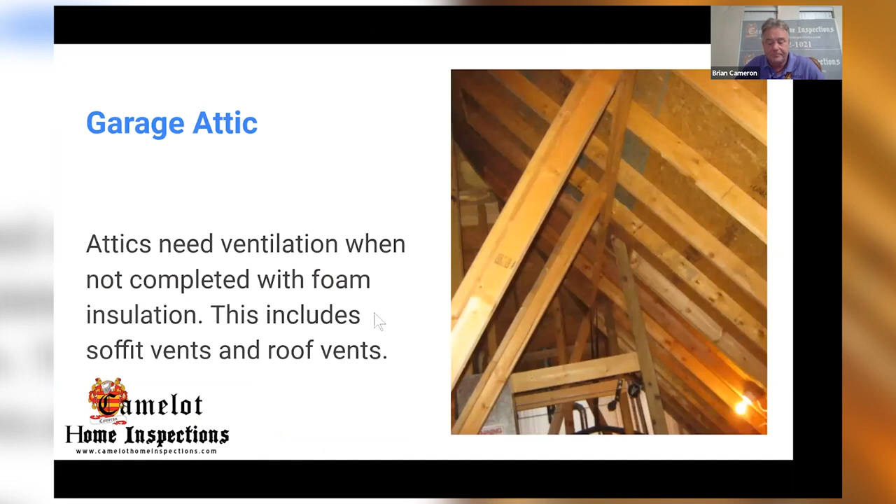That's not the end, we're going back because I still got 2 minutes. All right, I want to try to explain this the best way I can. I'm probably going to make a bird's nest out of it, so just bear with me. This is an attic where the house on the other side has no wall. You see this wall? Picture if there was a door that opened and closed right there. But also picture that foam and that wall did not exist.

And you have this above the garage. You can't do that. Two things need to happen. Either you make a wall, and notice they foamed the roof too. They foamed the roof, but they didn't do anything else, they just foamed the roof. This is above the garage. Two things need to happen here. Either they build a wall right here and make a door so you can get in, with vents in there. Even though it's got foam insulation on the roof, they still have to have ventilation in this part of the roof, in this part of the house.

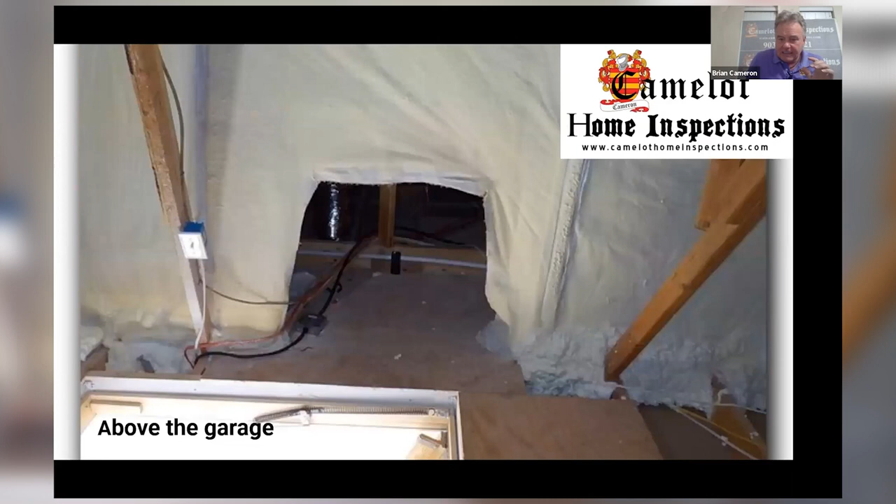There's no conditioned air inside a garage. The garage has fumes in it and everything else. That's why they would have to have a wall up here, and vents inside the garage, so that moisture can't build up on the wood that you see there, because it's not sharing the air from inside the house. It's got its own regular outside air that it's sharing, and you're going to have a temperature difference, and that's going to cause moisture.

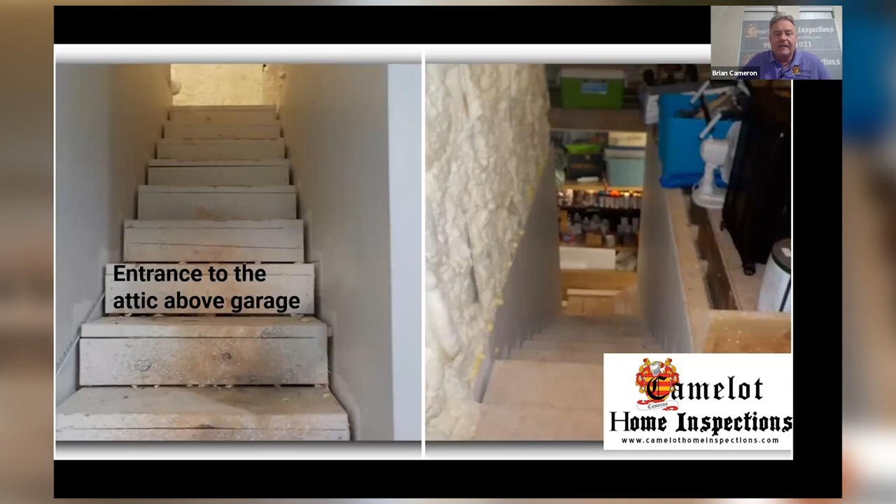This area right here is going up some stairs above a garage. There's no doors or anything going on, it's just going up into a foam place. This house is lived in, and the builder built it like this. When you go up these stairs, there needs to be a door or something to block this off from the garage. You can't just have it open like that and then go up into the attic area and the house area. It needs to be closed off from the house area, the area that has the conditioned air. Any questions there?

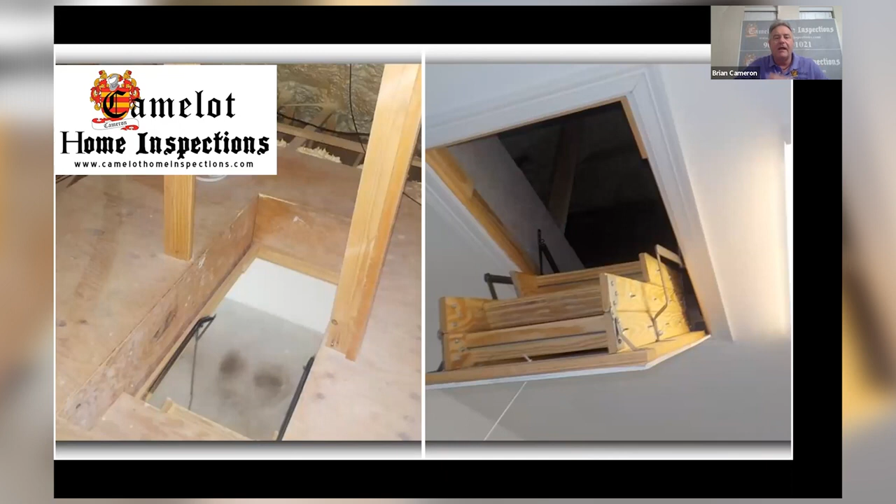If you have an attic area that has spray foam everywhere inside the whole attic, including the garage, and everything is done the way it should be done, and we'll see that in a minute, this access hatch cannot be inside the garage. It needs to be inside the house somewhere. Not necessarily this, but they need to have an access hatch inside the house, not in the garage. Again, you're never going to be able to seal this up properly to keep fumes out. So that access hatch would need to be sealed up, foamed over, and you'll see what I'm talking about here in a minute. And then the access hatch would be inside the house somewhere.

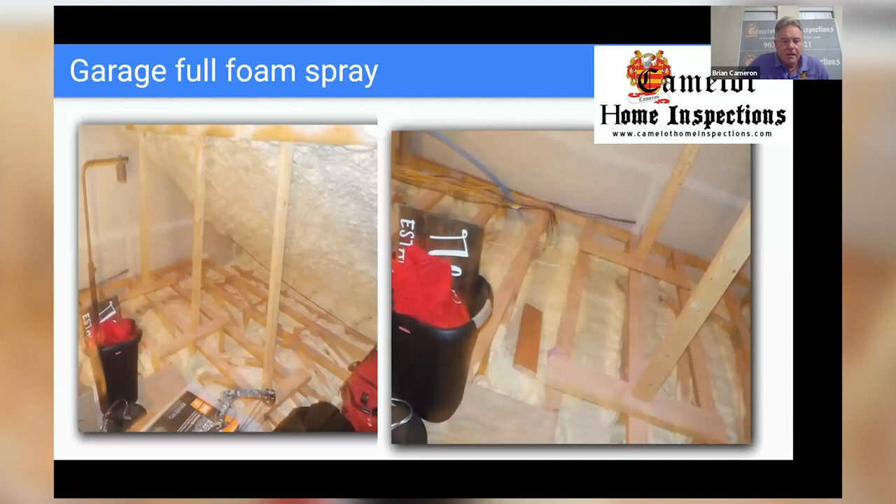This is a garage that has the foam insulation on the attic flooring and the foam insulation on the roof. And now then, it doesn't have to have a partition between the house and the garage because it's sealed off all the air. And now then it's sharing the air inside the garage, I mean, inside the main part of the house. All that air is being shared together, and it's okay because the foam's going to keep everything the same temperature.

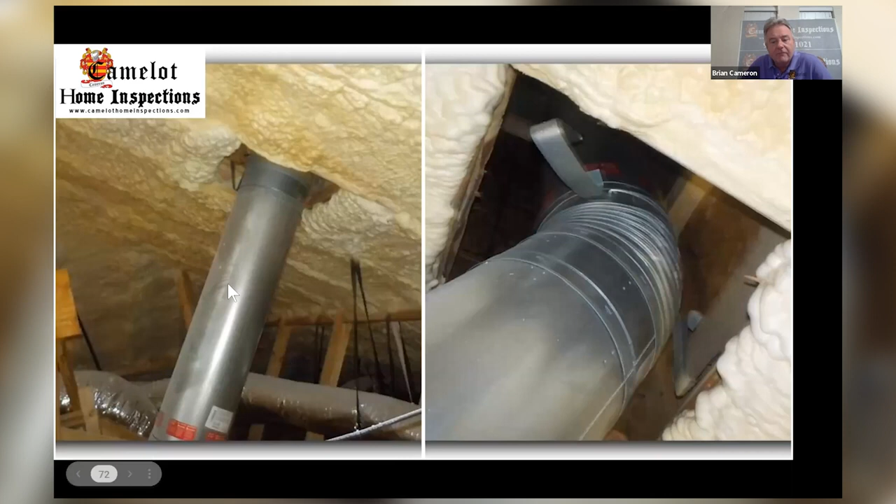Flues that come up, this right here is a fireplace. It can't be open like that, you got to have that closed off. What they'll usually do is put a heat shield here, and a heat shield just goes around this right here. It's bigger than this, about 3 inches, it'll be missing that by about 3 inches. Then they'll spray foam it up to that heat shield, and it's okay for the heat shield to have contact with that spray foam. They say that there's some foam too that they can use that is an orange color that is totally fire retardant. This stuff right here, this foam is supposed to be fire retardant too, but the orange color, if you ever see that, from my understanding, that is totally fire retardant.

And I guess that's it. There's a lot more to learn about this foam. This wasn't even, I should have started out with that probably. But I appreciate everyone coming and listening to this. Does anybody have any questions?

Guy, I'm not sure. Stephen, I'm not sure if they have it or not. I looked and I didn't see anything, but I'm not the greatest person in the world to go to InterNACHI and try to find stuff because there's so much stuff there. It's just, it blows my mind how much stuff is there on InterNACHI's website. You have everything at your fingertip. If they don't have anything about foam, they should.